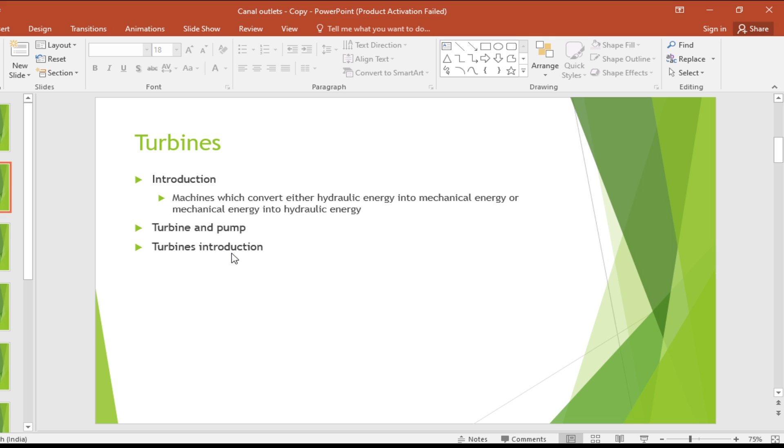Okay, now at present these hydraulic turbines are classified into several types, but before that we are going to learn the general layout of your hydroelectric power plant so that you can easily understand the actual function of the hydraulic turbine. Okay, so we'll move further for the general layout of hydroelectric power plant.

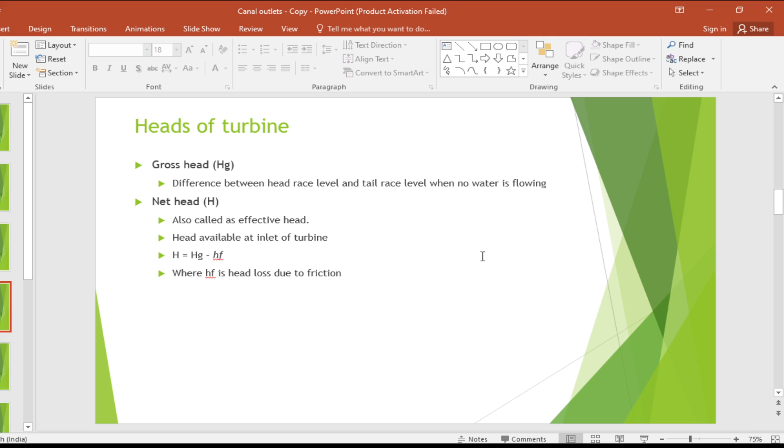Now we'll move further to efficiencies of turbine. There are four important efficiencies of turbine. First is hydraulic efficiency, second is mechanical efficiency, third is volumetric efficiency, and last is overall efficiency. Okay, now first, hydraulic efficiency. Hydraulic efficiency is denoted by eta H, H for hydraulic, and efficiency is obviously denoted by eta. So eta H is hydraulic efficiency.

Now, hydraulic efficiency is defined as the ratio of power given by water to the runner of turbine to the power supplied by the water at inlet of turbine. Okay, here it is a ratio of two powers. First power is the power given by water to the runner. This is nothing but the power delivered to the runner.

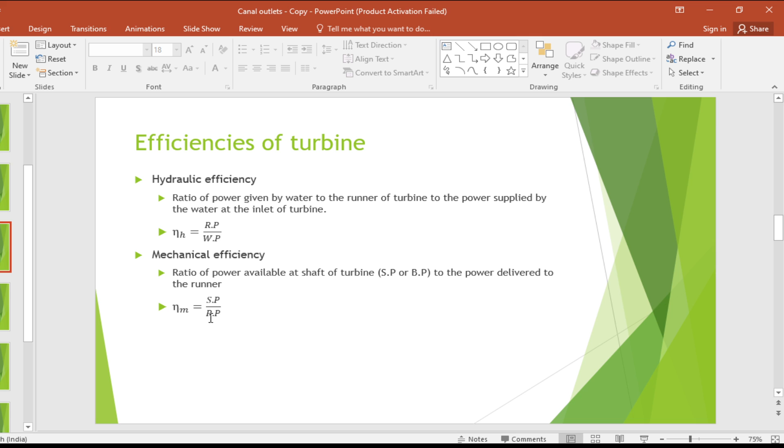RP, that means your runner power. So for equilibrium we can multiply this by RP divided by RP. Okay, RP divided by RP. But SP divided by RP and RP divided by WP, these are the two different efficiencies. So here you can see that SP divided by RP is nothing but your mechanical efficiency, so I have written SP divided by RP as eta M. And RP divided by WP is your hydraulic efficiency, so I have written it as eta H.

Okay, this step is somehow easy. You only have to multiply the overall efficiency ratio by runner power divided by runner power. This is simply a mathematical calculation. Runner power will come to the denominator of shaft power, and the water power will come to the denominator of runner power. So the equation will become shaft power by runner power into runner power by water power. But shaft power by runner power is your mechanical efficiency, and runner power by water power is your hydraulic efficiency.

So overall efficiency eta O can be calculated another way also, by simply multiplying mechanical efficiency and hydraulic efficiency. There are two ways of calculating overall efficiency: first is shaft power divided by water power, and second is mechanical efficiency into hydraulic efficiency. This is about the efficiencies of hydraulic turbine. Up to this we have covered efficiencies of hydraulic turbine, heads of hydraulic turbine, and the layout of a general hydroelectric power plant.

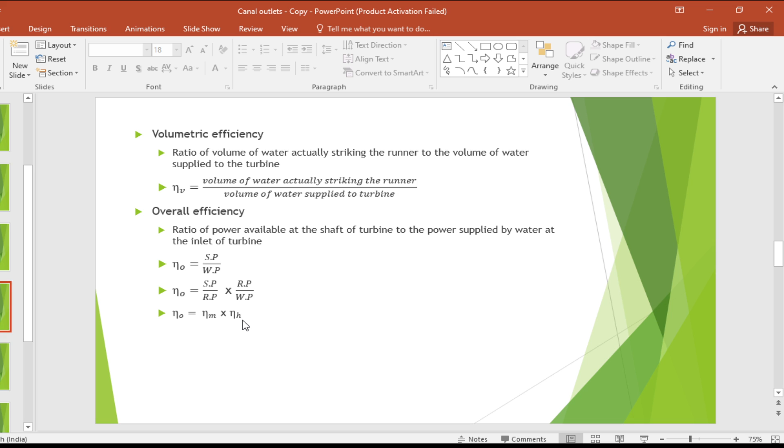Now we'll move further to the classification of hydraulic turbines. Hydraulic turbines can be classified in several types. We'll discuss one by one. First is according to the type of energy at inlet. Second is according to the direction of flow through runner. Third is according to the head at inlet of turbine. And last is according to the specific speed of turbine. Under these four heads there are again subtypes. Now first type is according to the type of energy at inlet.

Under this head there are two types: impulse turbine and reaction turbine. Now what is impulse turbine? If at inlet of turbine the energy available is only kinetic energy, then that turbine is called an impulse turbine.

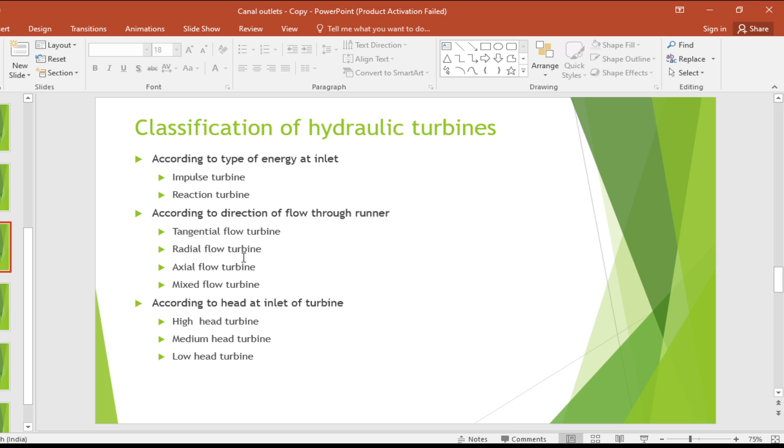Okay, when it goes from outward to inward it will be inward radial flow, and from inward to outward it will be outward radial flow. These are the subtypes of radial flow turbine. You have to study this also. This is about the classification of general turbines. Now we'll move further for specific Pelton wheel turbine or Pelton turbine.

Okay, Pelton wheel or Pelton turbine is a tangential flow impulse type of turbine.

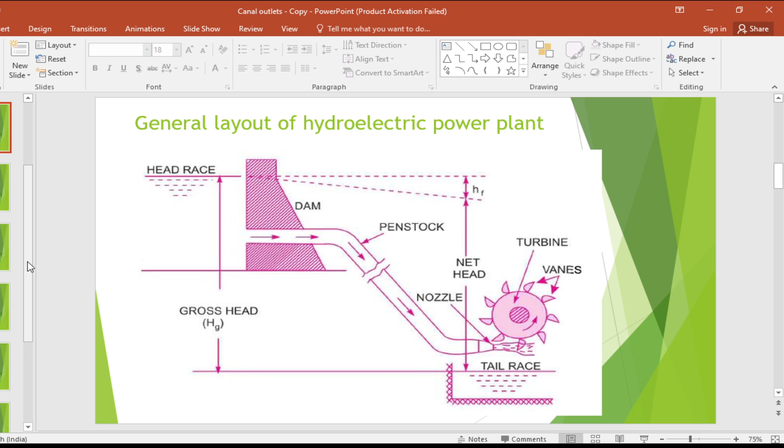Okay, now the main parts of this Pelton wheel turbine are nozzle and flow regulating arrangement, runner and bucket, casing and breaking jet. Okay, first is nozzle and flow regulating arrangement. What is nozzle? Nozzle you are already familiar with.